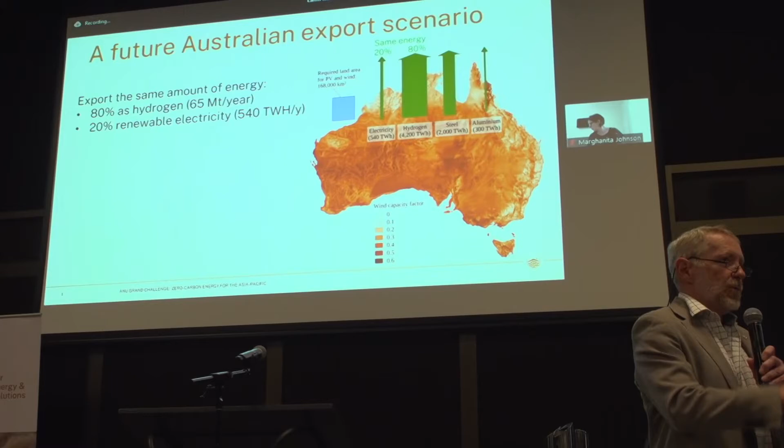Just to motivate this session, I wanted to show you this slide, which indicates some of the work that's come out of the Grand Challenge called Zero Carbon Energy for the Asia Pacific. So to paint a picture of what the future might look like: Australia is a major energy exporter, LNG, coal, etc. Let's just say the world continues to need the same amount of energy as we're selling now into the future, and if we were to export not LNG and coal, but renewable-based energy, the future might look something like the picture here.

If we export the same amount of energy in joules, not dollars or kilos, and say 20% of that was electricity through undersea high voltage DC cables to Southeast Asia and beyond, with 80% exported as hydrogen made from electrolysis of water using renewable energy, then we'd be looking at exporting 65 million tonnes a year of green hydrogen and 540 terawatt hours a year of green electricity. Just to give an indication, the total amount of electricity generated in Australia at the moment is 264 terawatt hours per year.

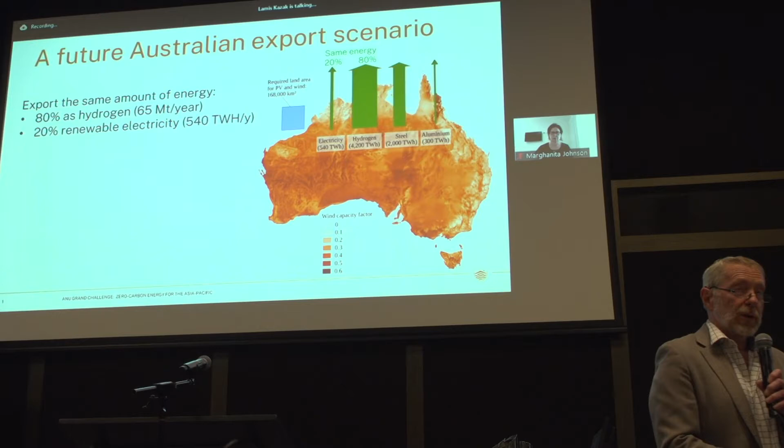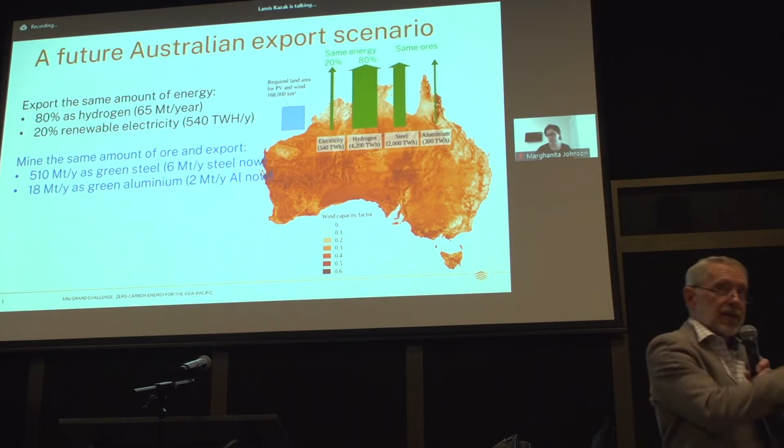That's more than double the domestic electricity through export, and a whole lot more through hydrogen. You can see on the screen the amount of renewable electricity required under each of those arrows. Now let's assume we mine the same amount of ore as at the moment, iron ore and aluminium ore, and export that as green steel and green aluminium, using renewable energy and hydrogen to reduce the ores into metal. In that case, we'd be exporting 510 million tonnes of green steel compared to 6 million tonnes of ordinary steel now, and 18 million tonnes of green aluminium compared to 2 million tonnes now. This would take large amounts of renewable energy, as shown on screen.

If you add this all up, the total amount of renewable electricity required is 7,040 terawatt hours a year. That is 27 times Australia's present electricity generating capacity. And if you add that to the 100% domestic electricity we need now, plus the other 200%, as Frank mentioned earlier, to electrify everything else, that becomes 3,000% renewable energy. Lots of people talk about a few 100% renewables, but if you look at the export picture, where the export tail is wagging the domestic dog, you can see the export picture makes this thousands of percent.

Even if only a fraction of this is true, these are really big numbers. And if none of this is true, then Australia's export future is doomed to be significantly less than it is at the moment. So we have to do at least some of this. That sets the scene.

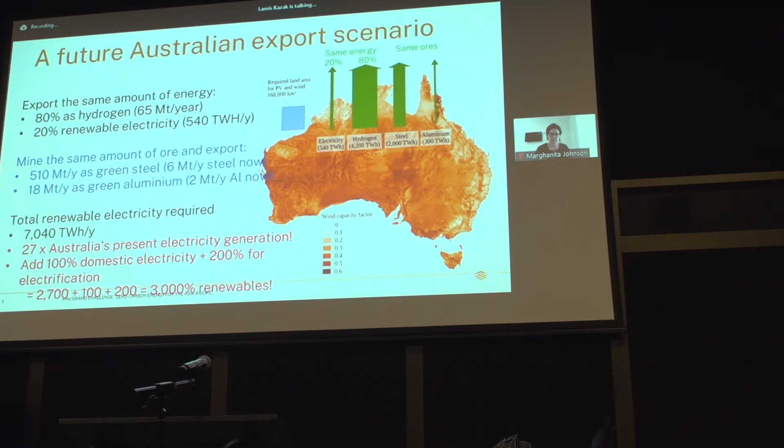Thank you. Yes, I'm going to dive right in.

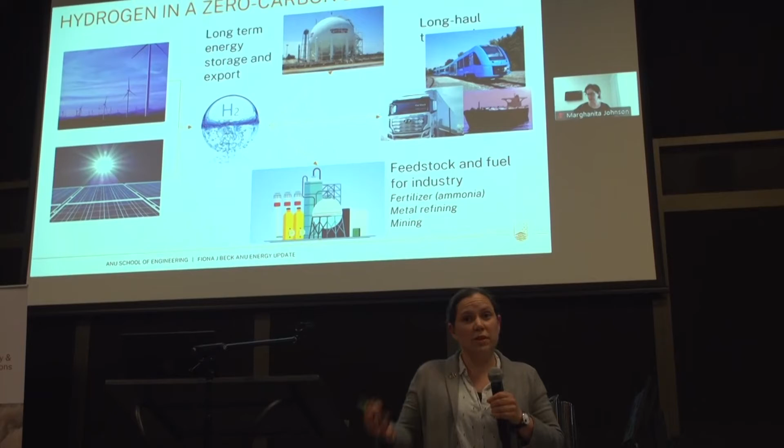So what do we need to do to get to net zero? Frank gave a good presentation on this. Clearly, the most important thing we have to do is install a lot of renewable energy very quickly, and electrify everything as quickly as possible. But after that, anything we cannot electrify, hydrogen has a role in the zero-carbon energy future.

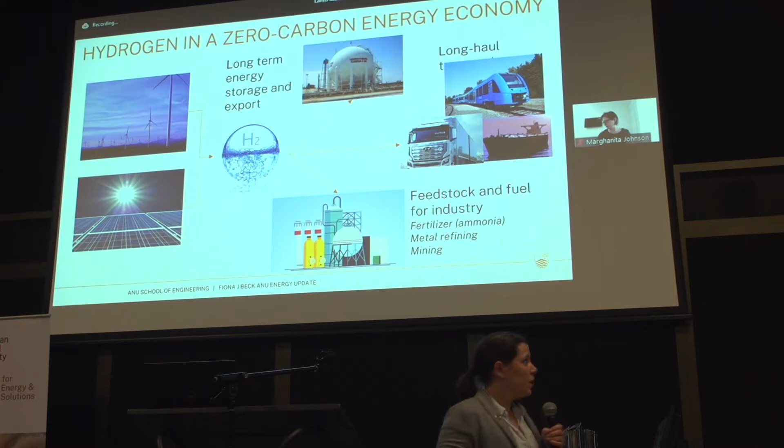So we can make hydrogen from renewable energy, and if we do that, we can start to abate these very hard to decarbonize sectors. That's things like long-term energy storage, energy export, long-haul and heavy-duty transport, and also fossil fuels, feedstock and fuel for industry, for example fertilizer, steel, metal refining, and mining.

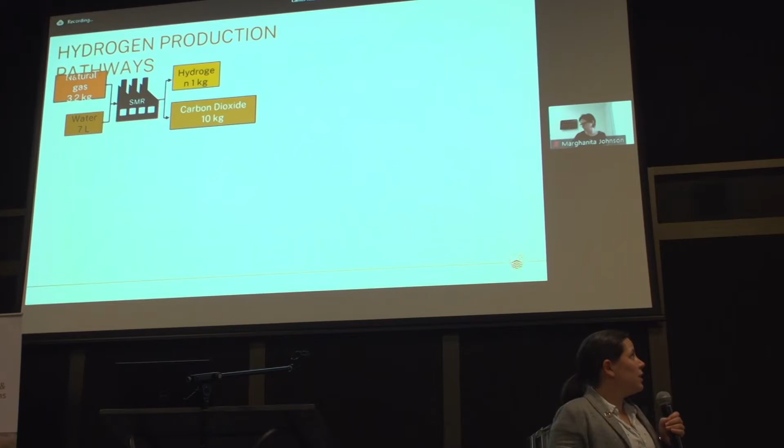So there are a number of ways to make hydrogen. Currently, we make it from natural gas using a process called steam methane reforming. You can also make it from coal and a range of other heavy hydrocarbons. This accounts for about 2% of global emissions at the moment.

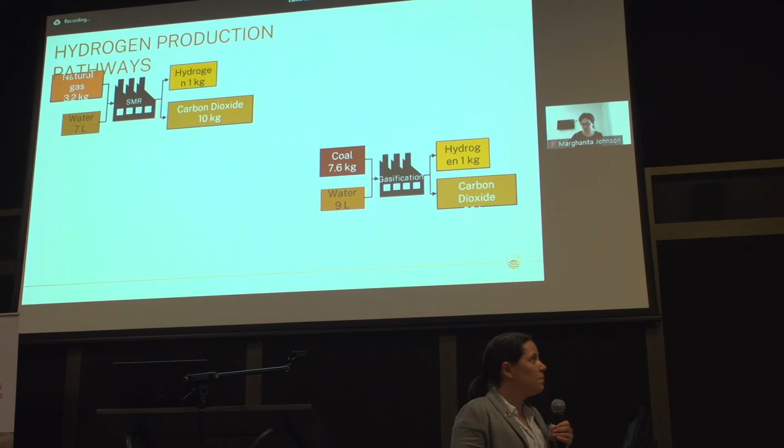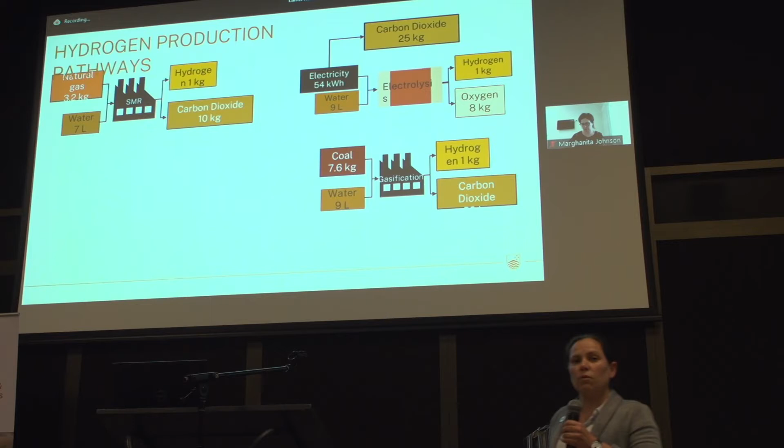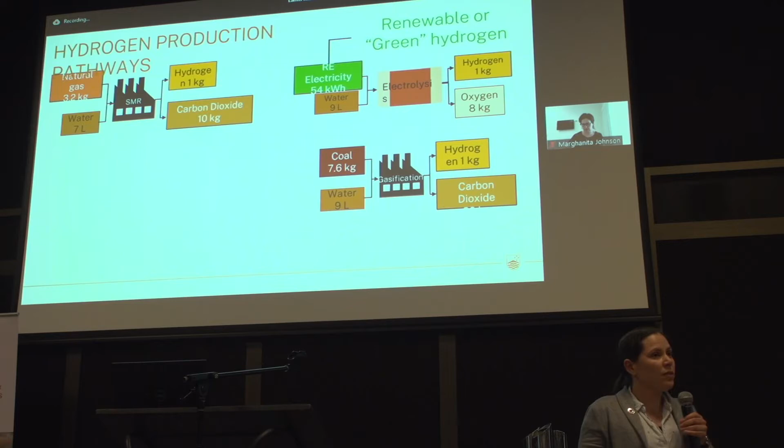You can make it from electrolysis. This is a process where you split water using electricity and you get hydrogen and oxygen. Obviously, if you do that with grid-based electricity, given that most of our grids around the world are powered by fossil fuels, that still results in quite a lot of carbon dioxide pollution. However, if you make this electricity from renewable sources, then this can become what we call renewable or green hydrogen, and this has no process emissions associated with it at all.

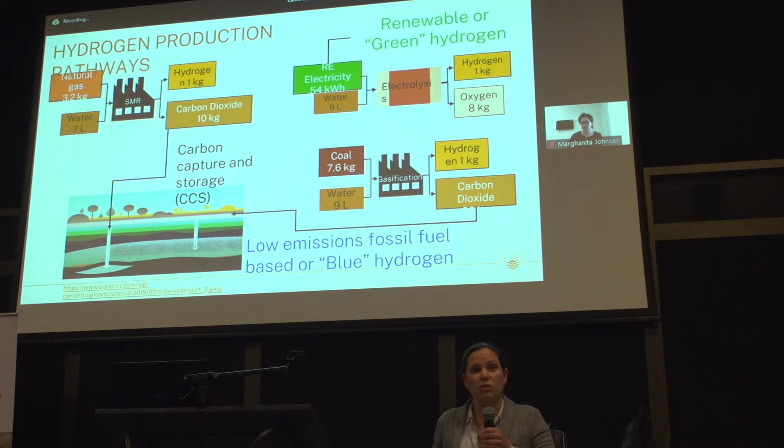There are other ways people are looking at for making low emissions hydrogen as well, still based on fossil fuels, using the same processes we've already used traditionally, but now adding carbon capture and storage technologies to capture some of those process emissions, compress the carbon dioxide, and pump it underground up to 2 kilometers, where it can be stored indefinitely in appropriate geological rock formations.

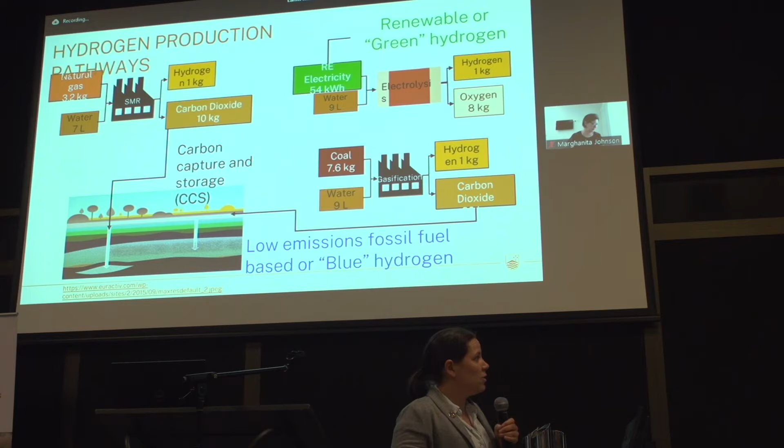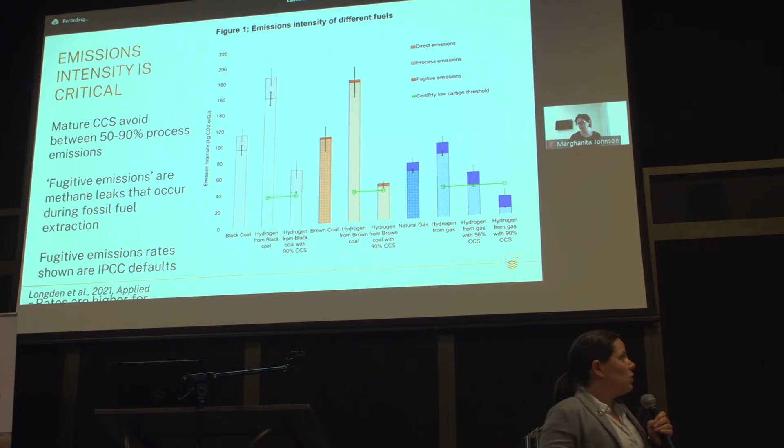However, the really critical thing here is the emissions intensity of whatever pathway you choose. Emissions intensity is the amount of carbon dioxide and other greenhouse gas pollutants released per unit energy of the fuel. This graph shows the emissions intensity of a range of different fuels.

You can see that for all the cases we are looking at, which includes black coal, brown coal, and natural gas, making hydrogen from natural gas results in more greenhouse gases per unit energy. It's only when you start to apply some carbon capture and storage technologies that you can start to reduce that. However, the graph also shows that the residual emissions can be quite significant.

This is because CCS is not perfect. Typically, with mature technologies which have been tested at scale, you can capture about 50 to 90% of the process emissions. That's not including the energy you need to transport the CO2 and pump it underground. CCS also doesn't account for any type of fugitive emissions.

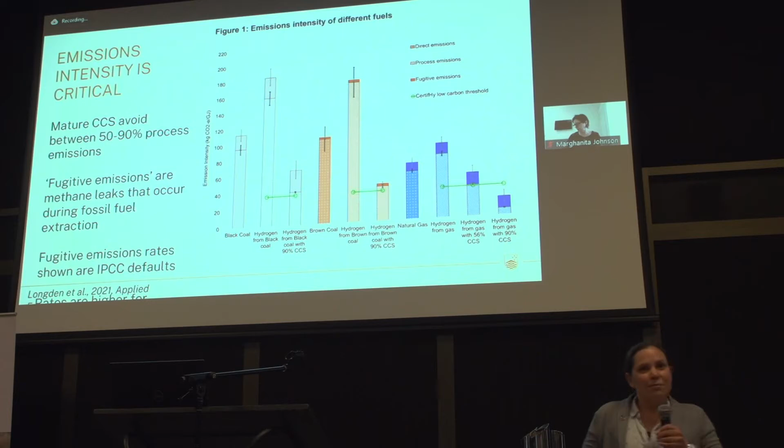Those are these solid boxes stacked on top of the bar graphs there. What you'll see if you look carefully is, in fact, making hydrogen from fossil fuels increases the amount of fugitive emissions you end up getting. That's because you need more of the fossil fuels per unit energy due to process inefficiencies. Adding carbon capture and storage actually makes it worse because you need more energy yet again. So whatever type of CCS you're using, you're always going to get more fugitive emissions.

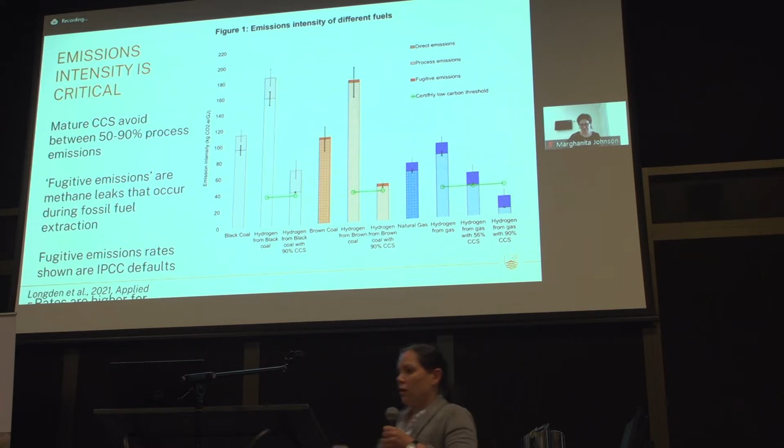So at the moment, low-emission fossil fuel-based hydrogen is still cheaper than green hydrogen, quite significantly. This is an analysis we did, led by Dr. Tom Longden, who was here. I think he's left. We did this analysis of a large number of studies, and it's fairly clear there is still a significant cost advantage to using low-emissions fossil fuel-based technologies.

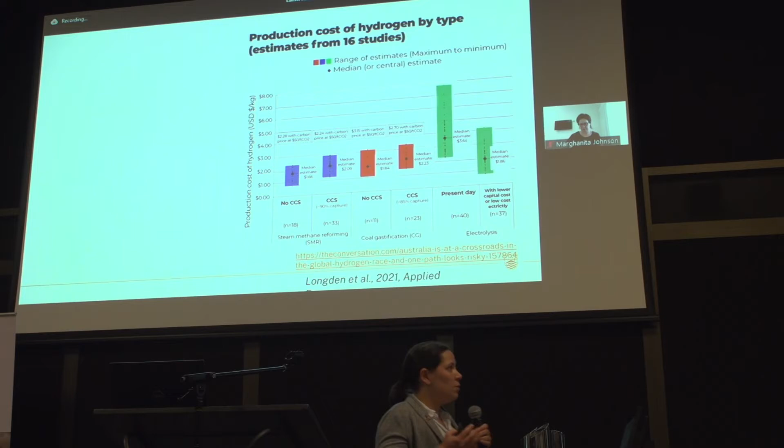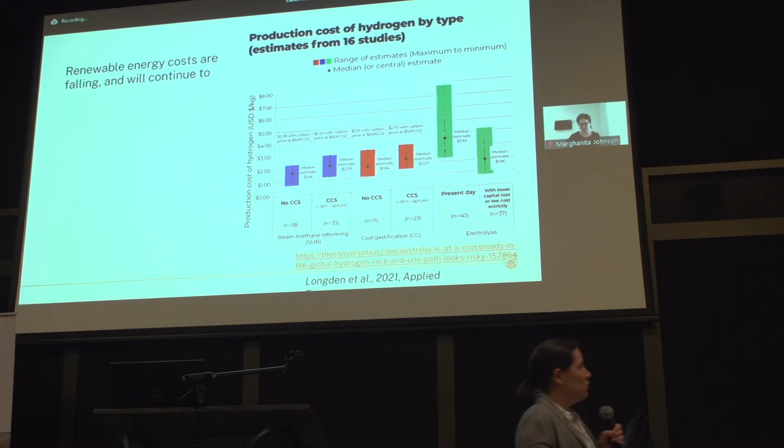However, there is a clear pathway for cost reductions in renewable hydrogen. This is because the costs of renewable hydrogen are determined by the cost of the renewable energy driving the electrolyzer and the cost of the electrolyzer itself. Renewable energy costs have fallen rapidly over the last few decades and are likely to continue doing so. Additionally, electrolyzer costs are very likely to decrease as well. Electrolyzers are a very mature technology. They've been used in industry for a very long time, but they're a niche at the moment.

They're not used very widely. If we scale up production to the gigawatts we're talking about to produce renewable energy, there is a very quick learning curve that we will move down, and costs could come down very rapidly.

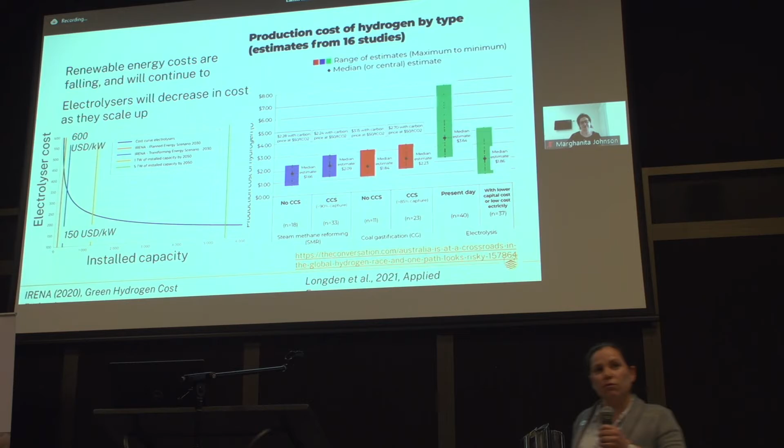This can't be said of fossil fuel-based hydrogen production, which is already at scale. There's already a 70 million ton hydrogen industry based on fossil fuels. CCS technologies have also been around forever, so there's less of a pathway for cost reductions.

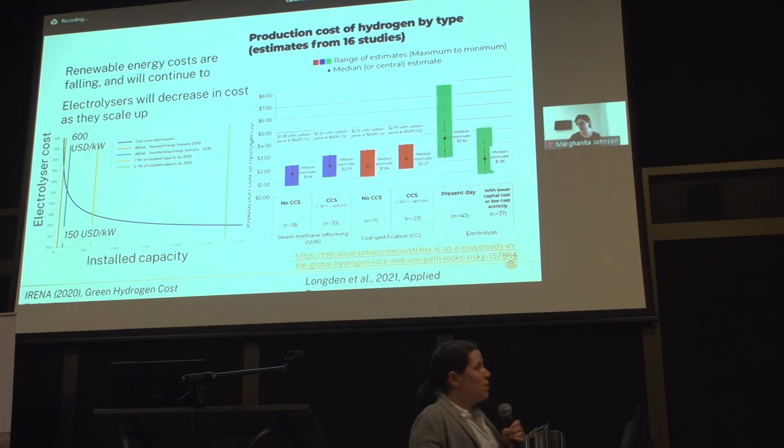All of this is to say that in the future, there is a very good chance that renewable hydrogen will be cost competitive with low emissions fossil fuel-based hydrogen.

So some very quick takeaways. Renewable hydrogen can help decarbonize hard-to-abate sectors. Developing a new, large-scale, low-emissions hydrogen industry based on fossil fuels could undermine global efforts to reduce methane emissions. Renewable hydrogen has a clear pathway to cost reduction and could outcompete fossil fuel-based low-emission hydrogen in the near future. It's not clear how near.

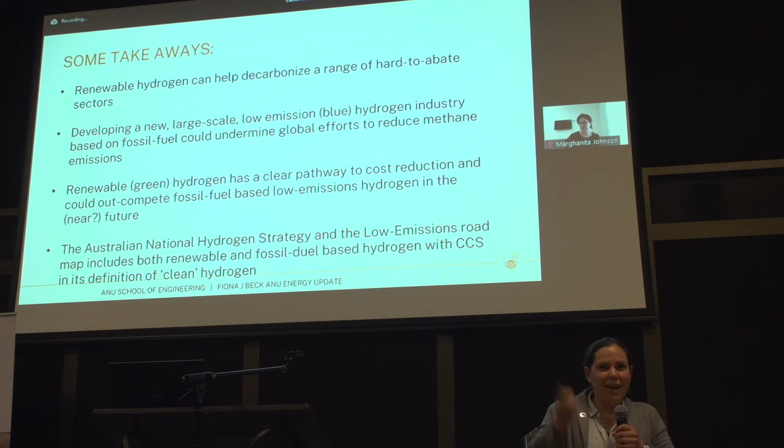It's really important to recognize that a lot of definitions of clean and low-emission hydrogen do include both renewable and low-emissions fossil fuel-based hydrogen. So it's not the label that you have to look at, it's the emissions intensity. Thank you very much.

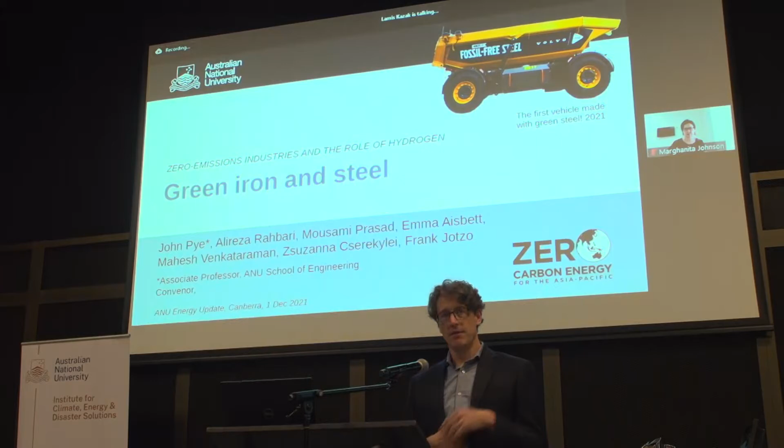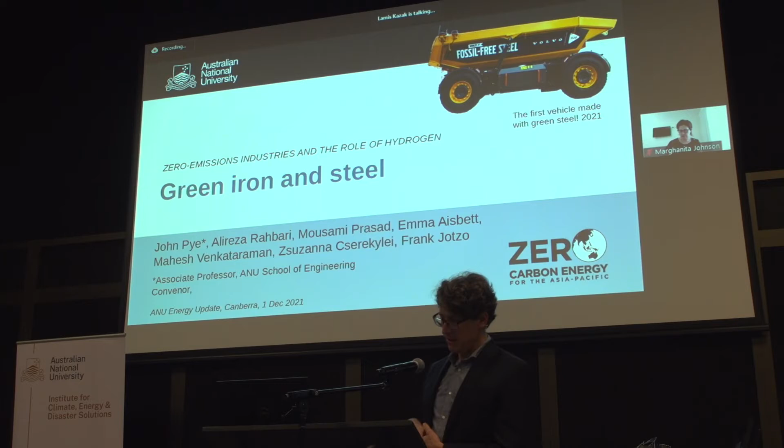Talking about green iron and steel next, and this is very much continuing from what Fiona's been talking about with hydrogen supply. The role of hydrogen in the evolving steel industry is going to be very important. This little picture on the first slide is the first ever vehicle made from green steel, a highlight from this year. I'd like to acknowledge the other ANU and non-ANU colleagues who've been involved in this work.

That's been done through the Zero Carbon Energy Grand Challenge here at ANU. So an outline for my very short presentation: I'm just going to quickly talk about the present iron and steel industry as well as some future technologies, some scenarios about where this might go as far as emissions, implications for Australia, and I'm going to mention the new heavy industry low carbon transition CRC that ANU's participating in.

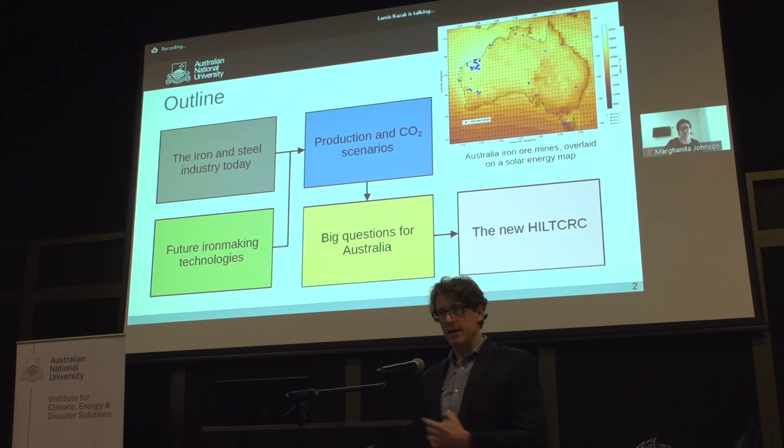So transforming this industry starts with transforming the blast furnace, which currently depends on a feed of processed coal, coke, to fire it up and drive the reaction, the reduction of the oxides in the iron ore, and that's where the vast majority of the emissions happen.

There are also emissions in other steps, which I'll come to briefly. But after the blast furnace, there's some downstream steps to eliminate certain impurities and all the rolling and shaping, but you don't have to worry about them so much when it comes to emissions.

Upstream of the blast furnace, there's processing done of the ore to reduce the number of impurities that go into the furnace, because the things that are in the impurities that go into the furnace then need to be eliminated, and that's energy intensive. So there's a sort of whole balancing act to get the impurities out of the process in the cheapest way at different stages.

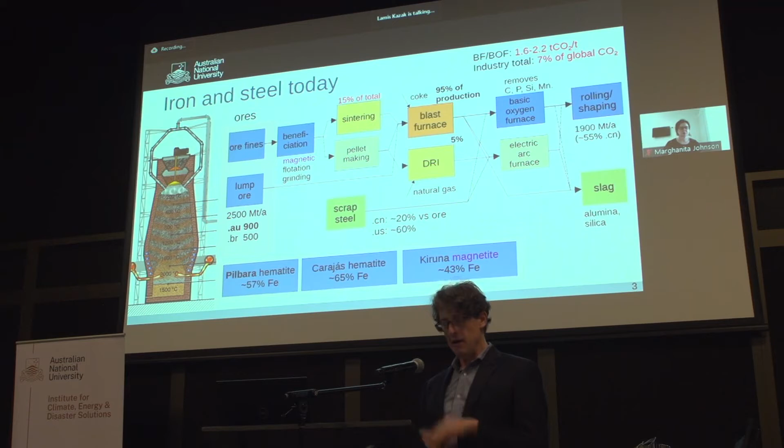Just to talk about ores: Pilbara hematite. There are various grades of iron ore, different minerals, but hematite is the big one in Australia and globally. Our hematite in Australia is around 57% iron, depending on the mine. In Brazil, the Carajás mines are very large with a much higher grade, about 65%. That's perhaps Brazil's strength in the iron and steel industry.

The third one I've listed is the mine in the north of Sweden, used to drive the green steel project I'll talk about in a minute. It's magnetite, a different mineral, only 43% iron, but because it's magnetic, that facilitates low-cost upgrading of the ore. They can get it up to nearly 70% using a magnetic separation process, which is really important.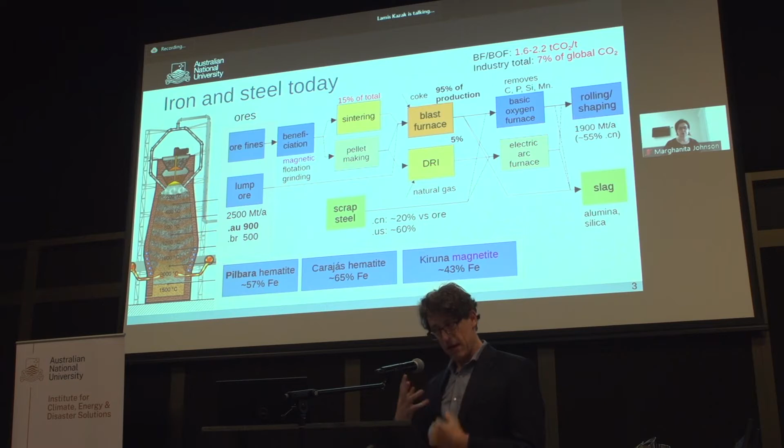In parallel with the blast furnace route is the direct reduced iron making pathway. It's only 5% of current production, uses natural gas, and is a bit lower in emissions. Also important to mention is scrap, which we need to increase as much as possible. In China it's only 20%, in the US it's up to 60% - very variable depending on where you are.

Lots of really exciting things happening in green steel in the last year or so. The HYBRIT process is the leader, based in Sweden - this is a hydrogen iron making process. They make pellets out of magnetite using biomass, then have a hydrogen furnace, and as I mentioned, they've been producing actual products just in the last year.

ThyssenKrupp in Germany has been injecting hydrogen into a blast furnace. That's not a pathway to 100% decarbonisation, but it's something that can be done at scale quite quickly.

Primetals in Austria has been starting up their fluidised bed iron making process. This is also a pilot scale system like the HYBRIT one in Sweden, but it's also on a pathway to 100% reduction of emissions. Finally, not a hydrogen technology but also of great interest is what's happening in the US with Boston Metal - they have a direct, very high temperature electrolytic steel making pathway. It's early days, but this might be one of the really interesting long-term technologies. It doesn't rely on hydrogen, but it's much further from market.

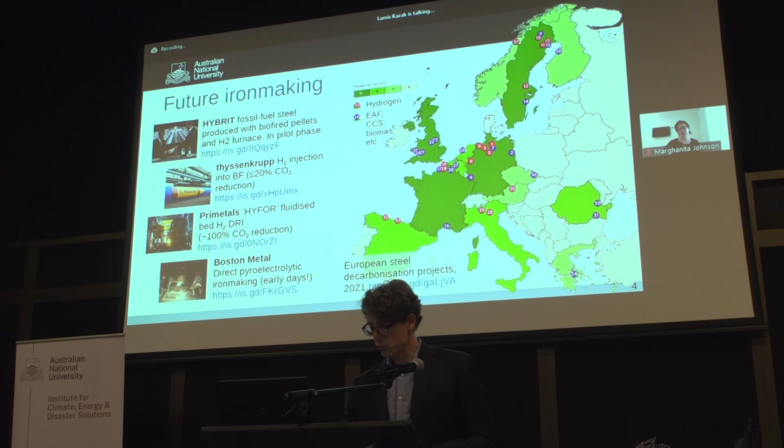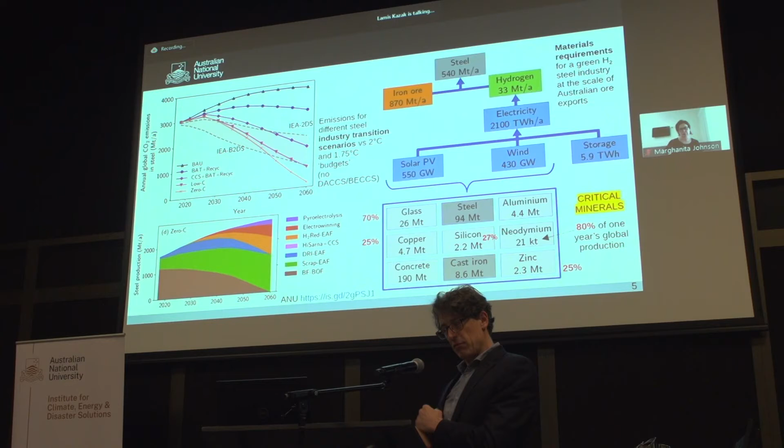These are some scenarios we did here at ANU in the Grand Challenge program. We wanted to consider different rates of reduction of emissions in this industry, and we took it as a starting point that the industry would be responsible for its own emissions. So all this discussion about CCS, bioenergy, carbon capture and storage, direct air capture, soil carbon - we assumed for this analysis that the industry would do those things internally rather than separately.

So we've got scenarios which involve CCS here, but for the reasons Fiona was talking about, CCS struggles to reach 100% reduction of emissions - it's hard to remove all the CO2 from these streams. Our scenarios identify that if we really want to get to zero emissions and want this sector to act for itself, then zero emission steelmaking technologies need to come in, and they need to be coming in quite rapidly from 2030, 2040 and onwards.

The plot on the right goes a little to Ken's points earlier about the resources required to power this industry, because it needs so much electricity to produce hydrogen for hydrogen steelmaking. If we imagine a hydrogen steelmaking industry at the scale of Australia's current exports, then yes, it needs lots of renewable energy, and it also needs lots of materials to build that renewable energy.

Some of the materials, for the scale we're talking about, are almost the entire global supply of certain materials for a year - 70% of global glass production, 80% of global neodymium production, which is used in magnets in wind turbines. I think this is doable over periods of a couple of decades, but it's obviously going to put a lot of pressure on those supply chains, which will be of increasing importance.

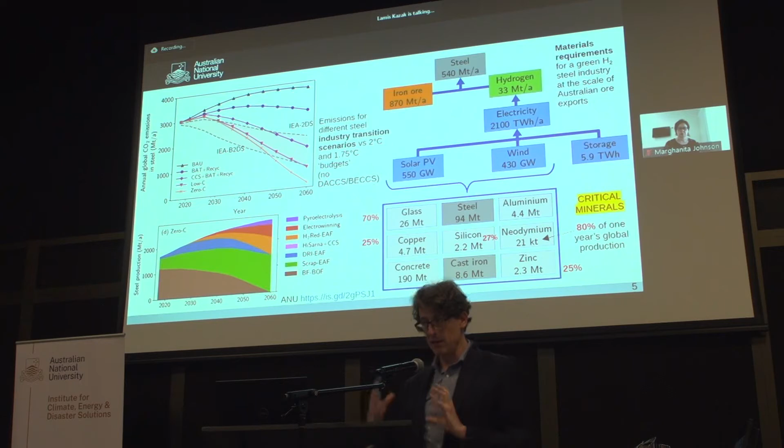So big questions for Australia in this whole space. Australia, as we've heard, depends very heavily on energy exports. Metallurgical coal, as opposed to thermal coal, is a huge one, and of course the iron ore. But neither of these markets are secure in the long term.

Brazil has that high-grade iron ore, and countries are going to be transitioning to hydrogen. It's entirely possible that we lose both our iron ore and our coal exports. We don't understand yet enough about how iron making will be adapted to our particular grades of ore in Australia - lower grade ores. We really need to spend time getting across how to adjust the process to be cost effective at scale with Pilbara ores, or we risk losing a really big income stream.

Alongside just how the process works, there's a question of whether we can do this in Australia, potentially at that scale. With large amounts of renewable energy, maybe in the Pilbara, how much of the process would we actually take on? It's possible to produce completely finished steel, or also possible to produce intermediate products like pellets, pig iron, and hot briquetted iron.

We really need to evaluate this in the emerging and evolving energy landscape and the changing costs of renewable energy. Not least of those things would be energy storage, because all of these iron and steel processes run continuously - we can't have a process that starts up and shuts down every day when the sun goes down.

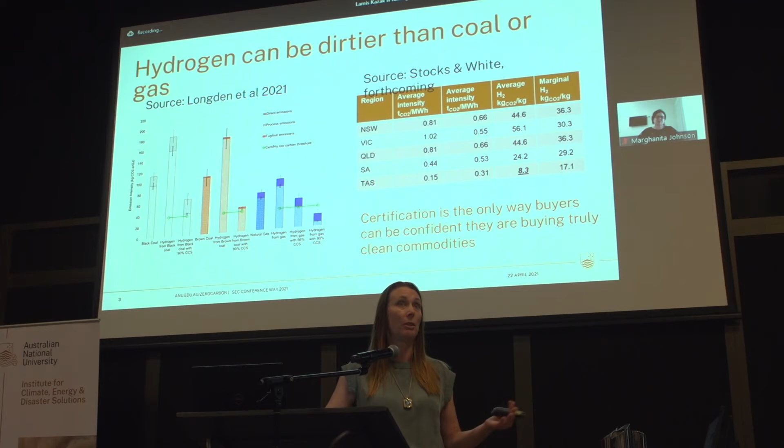So we want green. We know that just using an electrolyser is not necessarily going to get us green. So how do we show to our investors, to our consumers, that what we've produced is actually green and or low emissions? I really can feel for John in his comment on trying to keep up with what's going on in the real world. Sometimes it can be very frustrating being here in academia, particularly when you get the second revision on some nitpicky detail on a paper, when you're working in this space that is moving so incredibly quickly.

And what we are seeing is both public and private initiatives for certification schemes popping up in multitude, both here in Australia and around the world. There are a few problems that can arise from that, because not every certification scheme is going to be the same in important ways, and that means they won't necessarily be interoperable.

A couple of the key distinctions that are really relevant to the debate in Australia is whether you're certifying green or clean. Now, I've been using them synonymously here, but they are not the same thing. Green certification is usually when we're talking about 100% renewable energy being used to make a product, for example hydrogen or ammonia. This is the approach of the Smart Energy Council, who are leading sort of the major private or industry-led certification scheme for hydrogen in Australia at the moment.

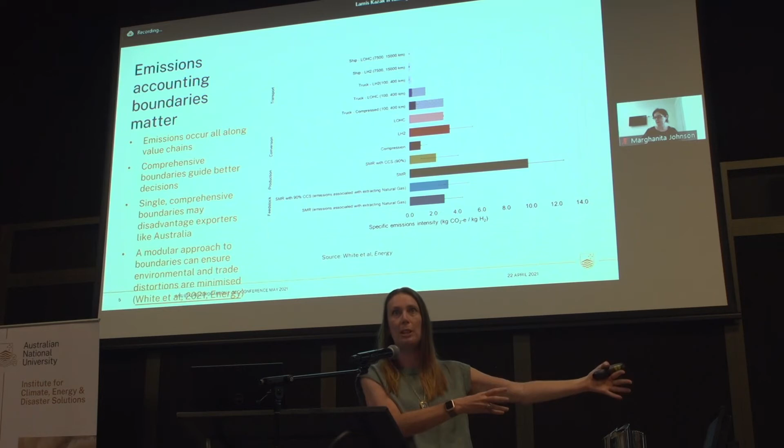So our suggestion was to balance both these important environmental drivers without producing non-tariff barriers to trade through certification schemes, was to take a modular approach to add up the supply chain emissions. That's our publication in Energy.

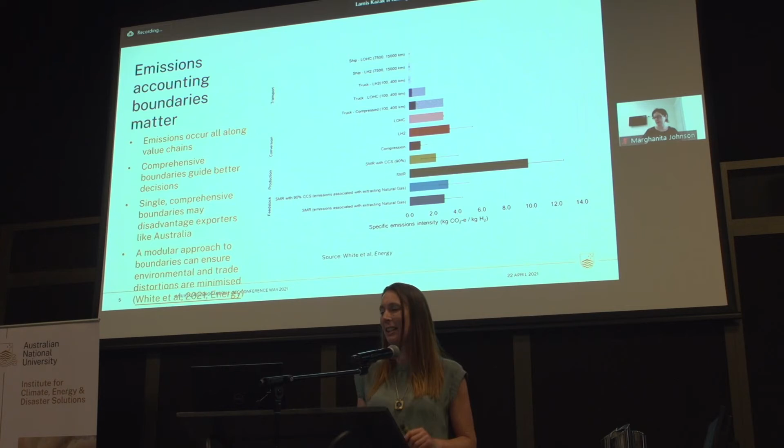So to conclude, certification is actually really complicated - the more I learn, the more complicated it is. There are a lot of competing approaches emerging, and that in itself can lead to excess regulatory burden for our producers of clean and green hydrogen. There's definitely an important role for governments to play in trying to get in and help with standardisation and lower that regulatory burden. So thank you all very much.

Not quite Adelaide, close, Queensland. Quite a long way away, but that's okay. Hopefully you can all hear me. We have some excellent Queensland weather going on today. And as part of that, I would like to acknowledge the traditional lands that I'm on today, the lands of the Turrbal and Yuggera people, and I pay my respects to their elders past, present and emerging.

Hopefully you can see my screen, and I'm going to give you a super quick overview of the industry. A bit like John, I've got to rush through mine to market really quickly - what we produce and where the main sources of emissions are.

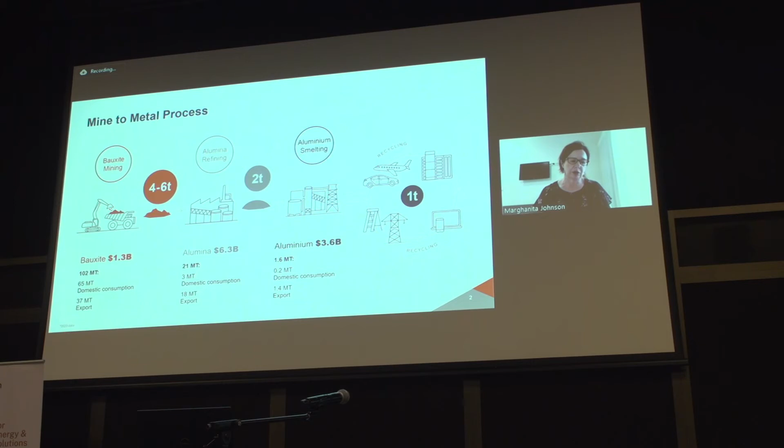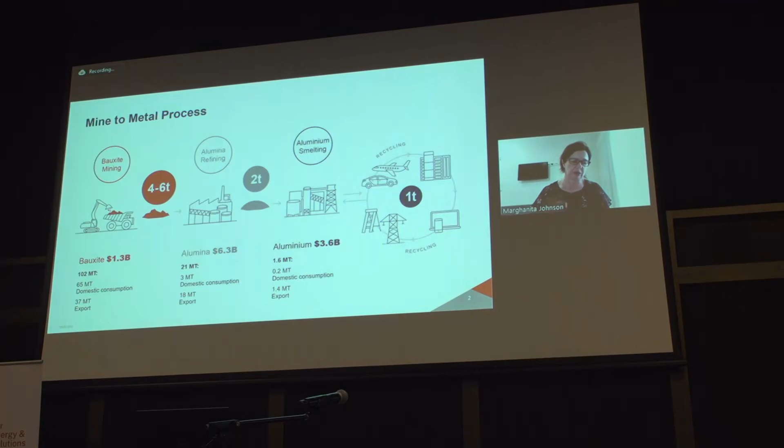Australia is one of the very few countries globally which has bauxite mining, alumina refining, aluminium smelting and aluminium extrusion. Depending on the grade of bauxite, you need 4 to 6 tonnes of bauxite to make 2 tonnes of alumina, to then make 1 tonne of aluminium, which can then be used for a very wide variety of end uses, but also infinitely recycled.

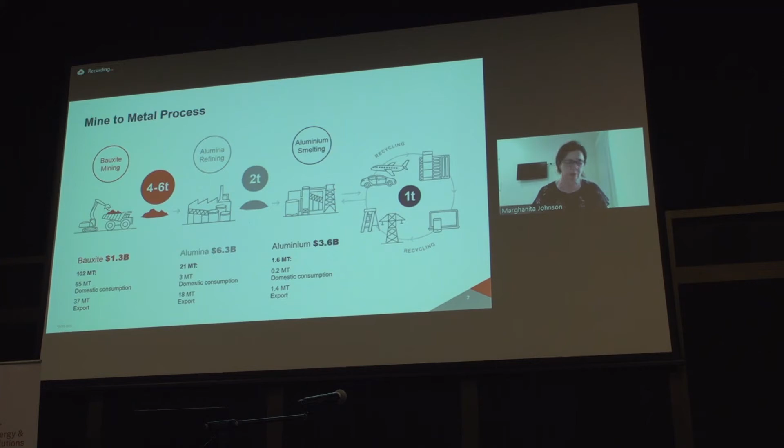You can also see down the bottom of the screen the relative tonnages that we produce here in Australia and the value of the products we export. The further downstream you go, the much higher the value derived for that product.

Looking at global demand, the world is increasingly demanding to understand more about their supply chains. Aluminium is a critical enabler of sustainable economic development, and its use is highly correlated with GDP - as countries urbanise, per capita use of aluminium increases. Today, global demand for aluminium is about 95 million tonnes, and about two-thirds of that is met through primary aluminium - that is aluminium produced from bauxite through to alumina through to aluminium.

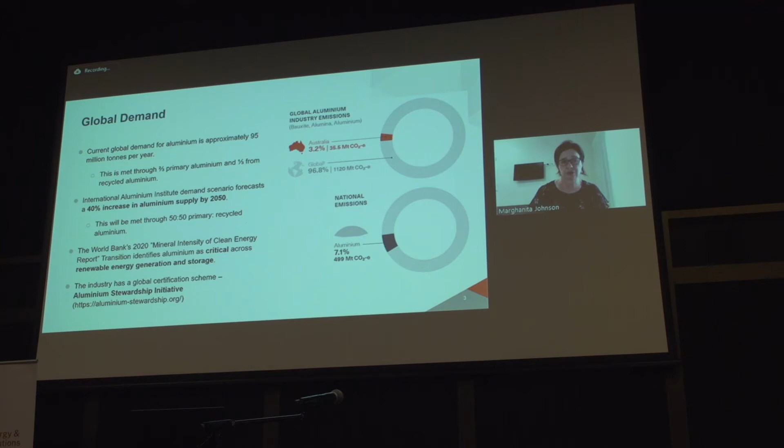The International Aluminium Institute has done some modelling to predict requirements out to 2050, and their estimate is that demand will need about a 40% increase by then. Even with projected increased rates of recycling, still only about half the global aluminium demand will be able to be met by recycled aluminium, so the other half will need to be met by primary aluminium.

That's good news for Australia. That's going to require the bauxite, alumina and aluminium that Australia produces. Going back to the introduction, it's a question of how much of that can we do here in Australia.

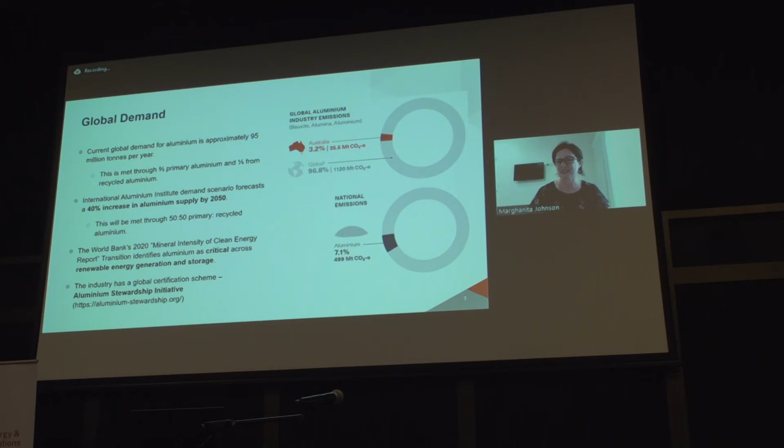Equally, it's worth looking at the global context for the emissions that we had. We produce around 35 million tonnes of emissions across the sector each year. That's about 3% of the global industry's emissions, or about 7% of Australia's national emissions.

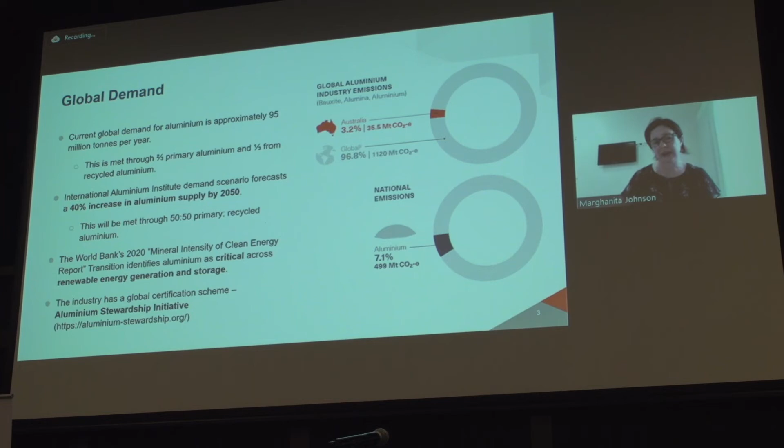I won't go into it in too much detail, but if you're interested in how the aluminium industry is tackling the problems Emma raised around certification, have a look at the Aluminium Stewardship Initiative, which allows you to certify facilities not just on clean or green, but on a very large range of sustainability metrics across the full spectrum of ESG.

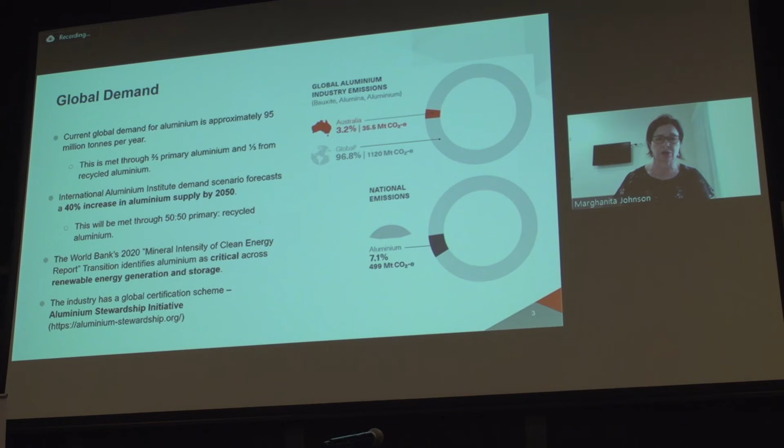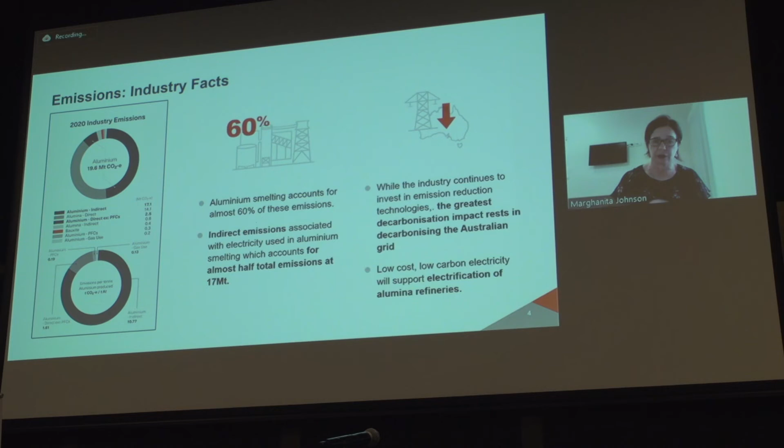So, getting down into the detail of the emissions the industry produces - the single biggest opportunity we have to decarbonise the vertically integrated industry is through decarbonisation of our electricity supply.

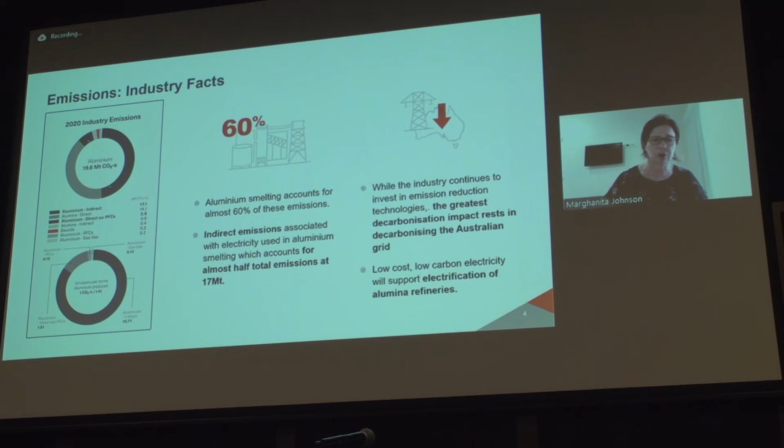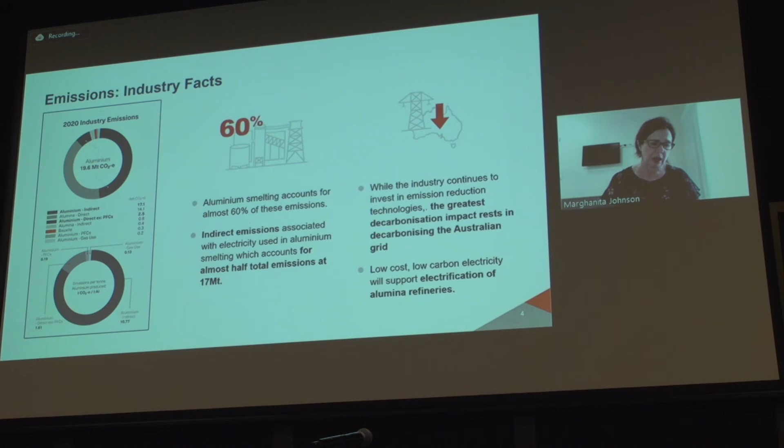Aluminium smelting produces most of the emissions at the moment. About half of the emissions in the industry come from the indirect emissions from smelters - the electricity we use. But smelters are already fully electrified, so we don't need any new technology within the smelter for conversion. It's also really important to note that Australia's grid-connected bauxite mines, alumina refineries, and particularly our smelters are performing an important enabling function in grid stabilisation, helping with increased penetration of variable renewable electricity.

What we see as the next challenge in the grid is how do we develop firming solutions at scale to help support even greater increased penetration of variable renewables.

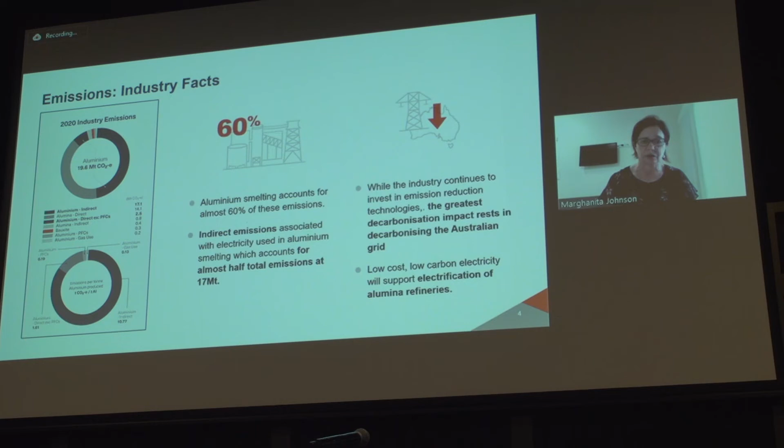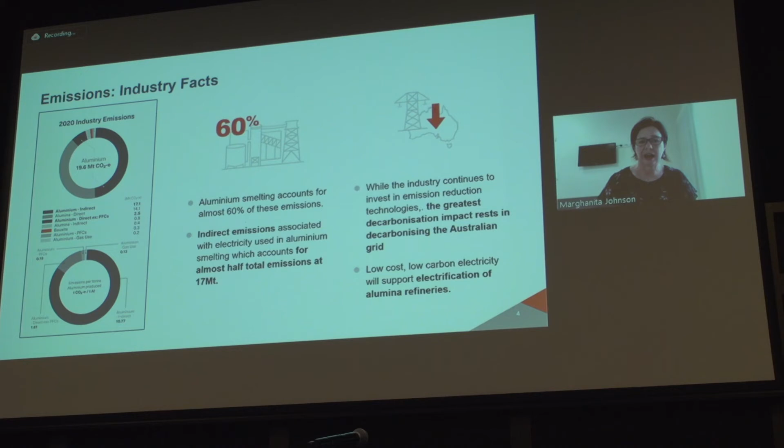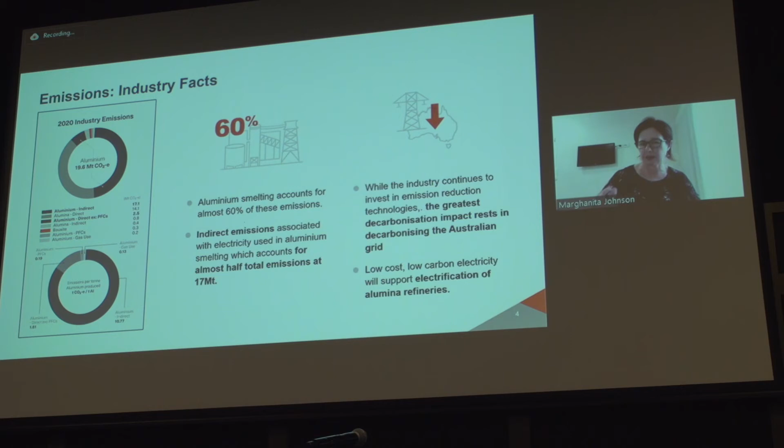So while we often talk about aluminium, a very large part of the challenge is in fact alumina, and that's because most of the emissions for alumina are direct emissions. Australia's alumina industry already has some of the world's lowest emissions intensity - about 0.7 tonnes per tonne compared to the global average of 1.2. So we're already starting from a great baseline, but there's of course always opportunity for improvement.

So I'm going to duck in now to talk a little bit more about alumina, because that's really where I see the challenges are. As was mentioned by John, we're partnering through my members, but also with the council directly through the HILT CRC, as well as partnering with government agencies like ARENA.

Within the alumina refining process, about 95% of the current emissions - 15 million tonnes a year - are direct emissions. Refineries currently use a mixture of coal and gas, depending on their location and historic access arrangements. So in the industry we actually usually talk around energy use rather than emissions, because when looking at process technologies, it's easier to compare apples with apples across refineries.

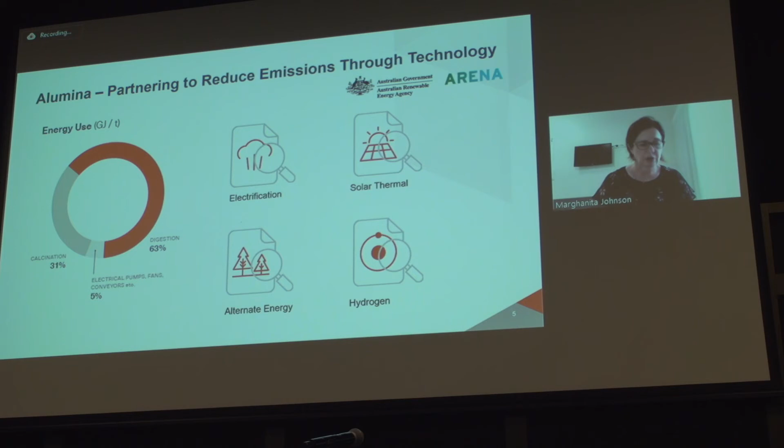It's also worth noting that all of our alumina refineries already co-generate some or all of their electricity, which is otherwise a really obvious first step. The Bayer process, used by alumina refineries worldwide, involves four steps: digestion, clarification, precipitation, and calcination.

The two most energy-intensive parts of the process are digestion - as you can see from the pie chart, that's almost two-thirds, just over 60%, which is creating steam at 150 to 270 degrees - and calcination, nearly one-third, where we need to heat the alumina precipitate to temperatures of over 1,000 degrees. So those are the two main energy processes.

The industry is partnering on multiple pathways to look at what we can do and what alternate energy sources there are. The main ones are electrification, to see what parts of the pathway could be used, particularly looking to make electricity the primary part to replace digestion.

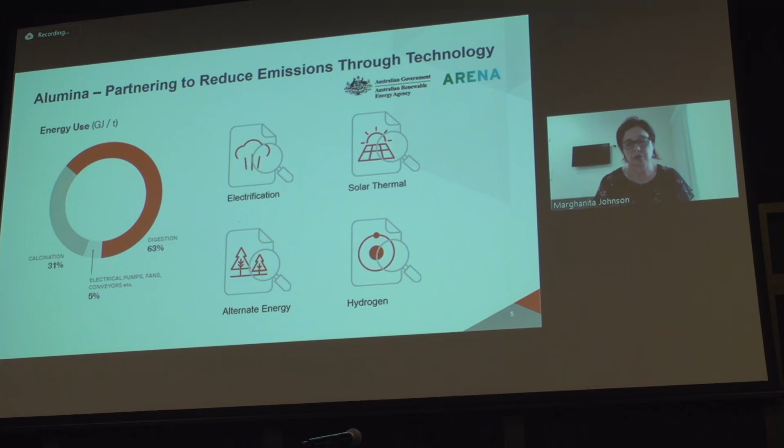That's nearly two-thirds of the pathway. So obviously, you could just swap existing electricity supply in and use electric digesters or electric boilers. They are currently available, but not commercially viable. So you couldn't do that and still make money, and therefore you wouldn't make alumina.

We're also looking at mechanical vapor recompression, a technology which uses mechanical compression to upgrade waste steam. That technology is widely used in other industries, and Alcoa is currently trialling it in partnership with ARENA.

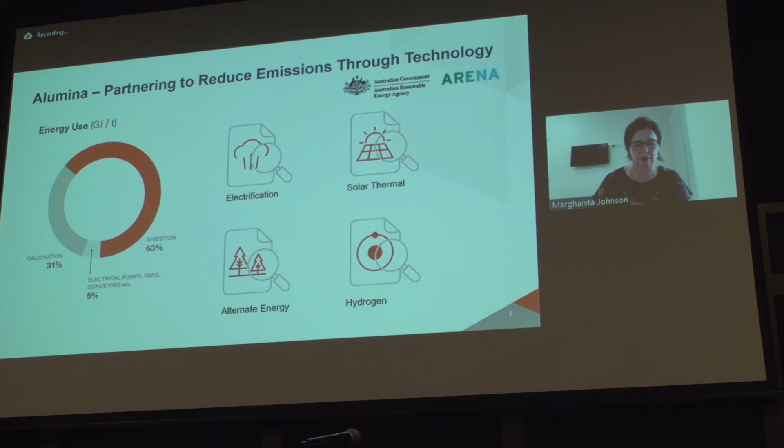The industry is also looking at ways the production and use of renewable hydrogen could be used in its process, particularly in calcination, because that might be the technology we need to reach temperatures over 1,000 degrees. Rio Tinto has partnered with ARENA to study whether hydrogen can be used in the calcination process. Additionally, it's possible that hydrogen could be used to replace gas in the boilers for digestion.

That's seen as less likely at the moment. It would require a substantial capital retrofit and is less likely than direct electrification.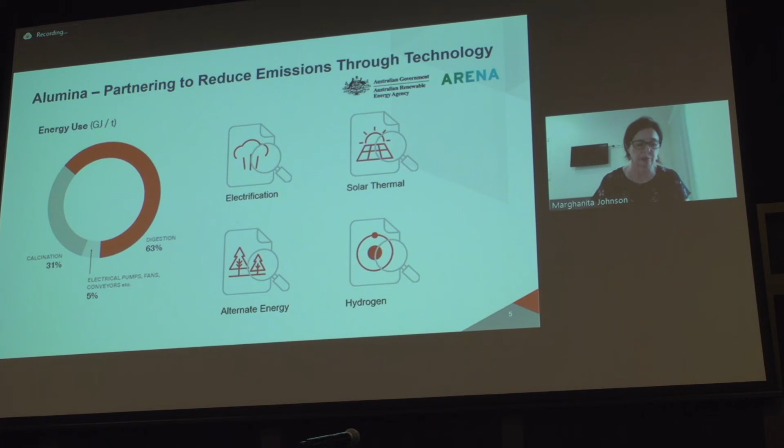We're the world's largest producer of alumina outside of China, so much of the global research into alumina technologies is being done here. Importantly, if successful, the technological and commercial lessons from these studies could be applied to the global alumina industry and other energy-intensive industries here in Australia.

Thank you. I will try and stop sharing.

Yeah, I'll do it. Great, thank you, Margie, and apologies for being geographically challenged—it doesn't appear on the screen where you come from, so I'm glad you corrected us. That's okay. So I'm now going to invite my speakers to come up and join us here at the chairs.

We'll have an opportunity for Q&A, and with the Chair's privilege, I'm going to start off the questions by asking one that was actually part of the discussion we had earlier from Peter Ashworth, about hydrogen and water. Peter was worried that in a dry country like Australia, using electrolysis to make hydrogen from water would be an issue because we're water poor. So maybe, Fiona, you could enlighten us as to whether this is going to be a problem or not. Great, thanks a lot, Ken.

Yes, we do need a lot of water to make hydrogen. Interestingly, you don't need that much more water to make hydrogen from electrolysis than you do to make it with coal or gas—in fact, if you make it with CCS from gas, you need something like 14 litres instead of the 9 litres needed for electrolysis. That's a lot of water. You could desalinate water to provide that, and the energy requirements are less than 1% of the total energy requirements you would need. So you could just factor that into your renewable energy.